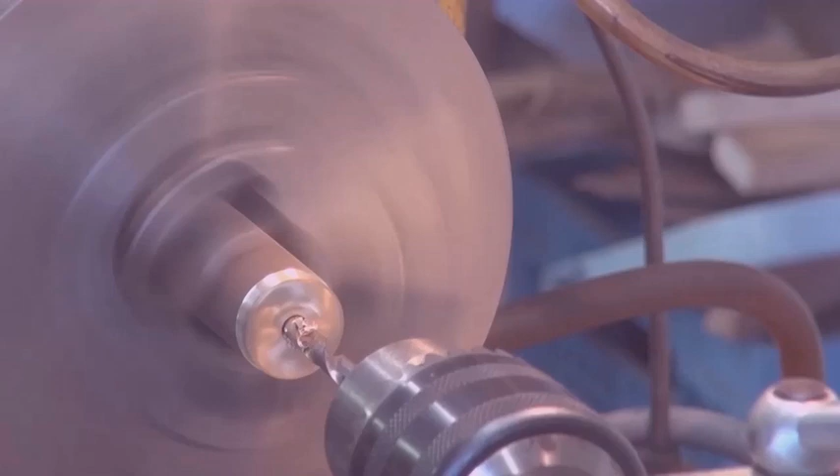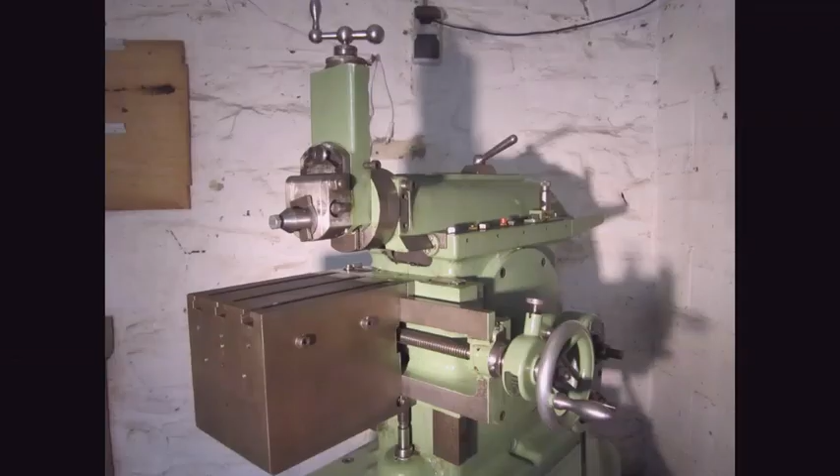For more than 2 months now I haven't done anything in this workshop because of this cancer I have, but that's okay. I thought today we're gonna try to make something. But before I start whatever project, maybe first I'm gonna clean up this mess, because it's been more than 2 months that all this stuff is laying here.

I think this one goes here.

I think when you have a workshop where everything is more or less clean, that's a big part of happiness. I know for some people happiness is just an illusion, but for me it is not. I believe you cannot live happily, have a happy life, without it. Maybe that's an illusion, but my system is I try to be happy with the smallest things.

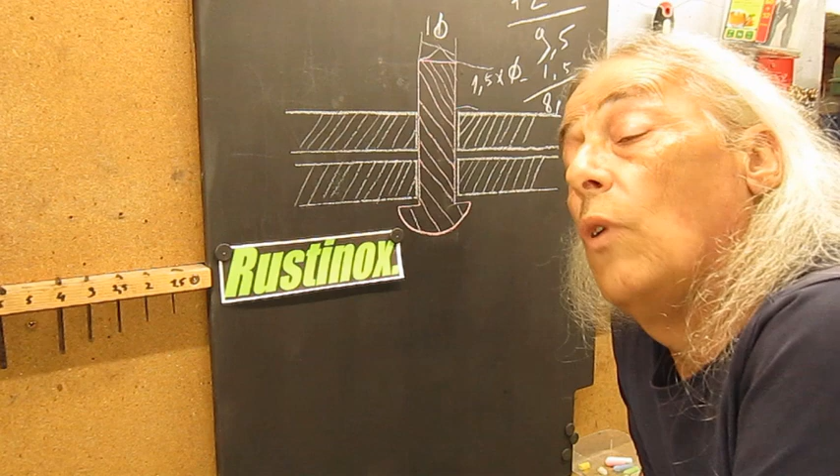I think that could be a beautiful project to do. Here also you can see it's been a long time since I've been in the workshop, because the rivet video thing is still on my blackboard, so we're gonna take it off. Oh, and my TMC project is still here.

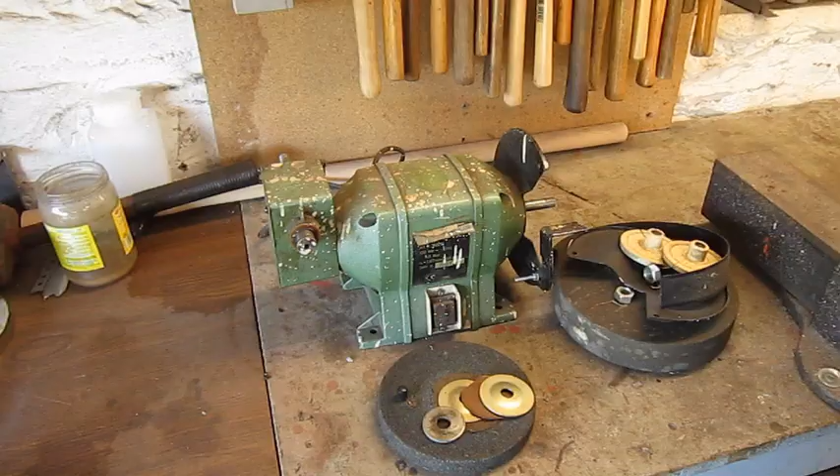Magnets. Another upcoming project is to try to make something useful out of this cheap scrappy thing I recycled. The motor seems to be okay. Axle spinning freely, no problem, no end play. Here seems to be a problem, you see.

And then the fun trick is you have this, I'll move it a bit, the high speed wheel on one side. You see how crappy it is. And then take all the junk out. This big one is a low speed wheel, but I think it's a bit of a weird idea to mount it on the back side. It should be better this side. I don't know. And you cannot use it with water because there's only a guard, that's all. There's no water container or oil container to use it.

So this is an upcoming project. Of course, I don't know when, but we'll see.

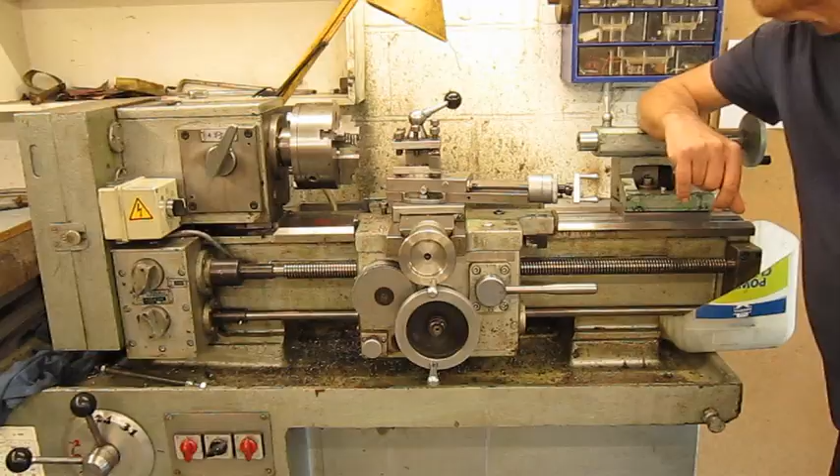Another upcoming project is gonna be to fix the tailstock of this lathe. Let me explain. Some previous owner, I don't know who, raised this headstock. You see here this gap. So this height we win in height between the spindle and the bed.

Of course, to compensate for this height, you have to make this plate to raise also the tailstock to have it back in line. But since I have this machine, there's a problem here with stability, and I think there's something wrong with the angle they cut out, or I don't know what, some dimension problem, and I think I'm gonna make a new plate for it.

So I have to find a piece of steel, these dimensions a bit more, and try to make it better. Yes, I did say try, because I think this is a complicated project.

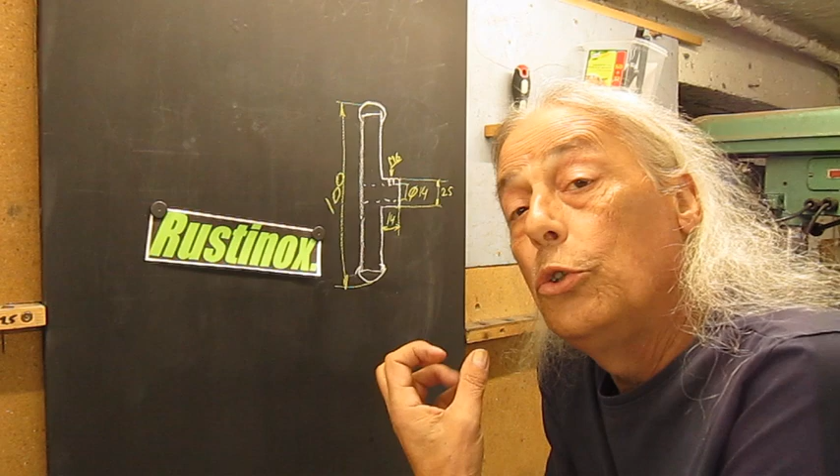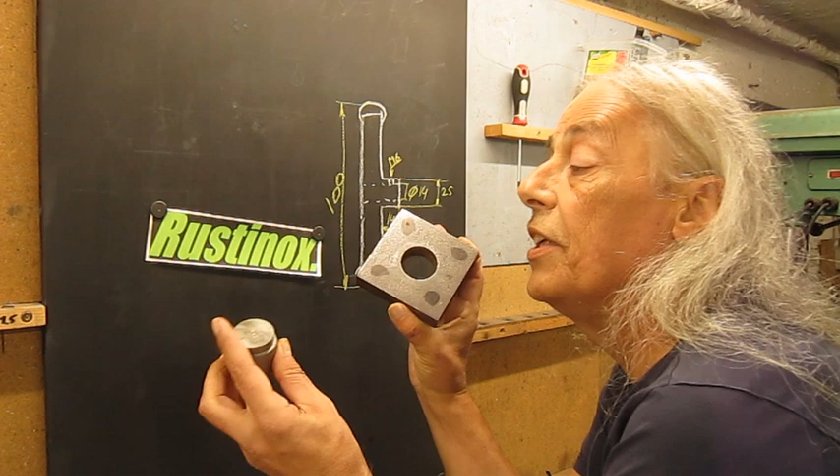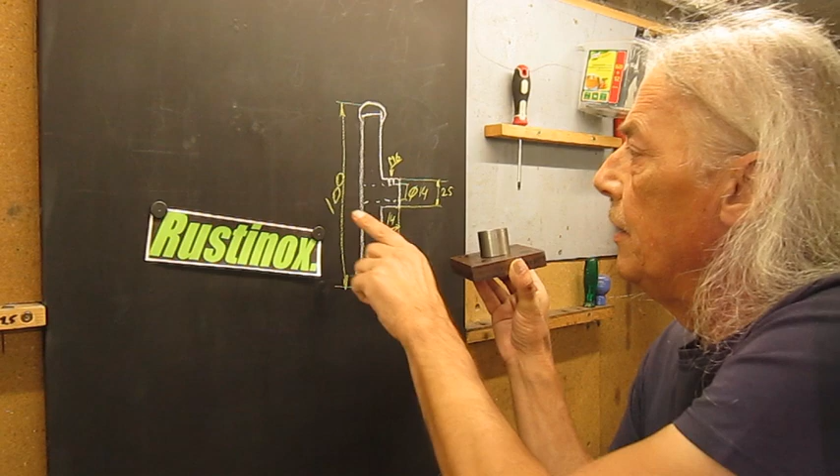I think today's project is gonna be to make this little handle I told you for the shaper. Of course, I do not have the good raw materials to make one, but I have this square thing with the hole in it, and this hole is way too big, so my idea is to make a plug, weld it in, and then cut the corners off, and out of this I can make these dimensions you can read.

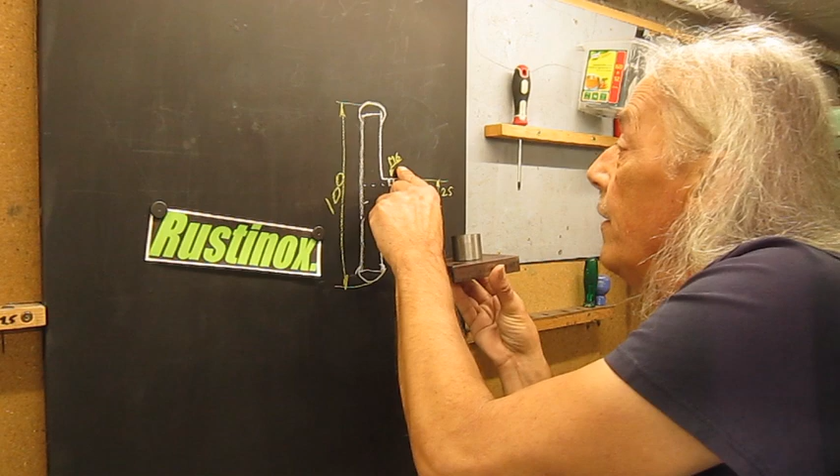So this 100mm will be a bit less because this square is 100mm. But I suppose that's okay. And then drill a hole and tap M6 for the set screw. I think that's a beautiful little project to start with.

In theory this should fit. I'm going to give it a little try.

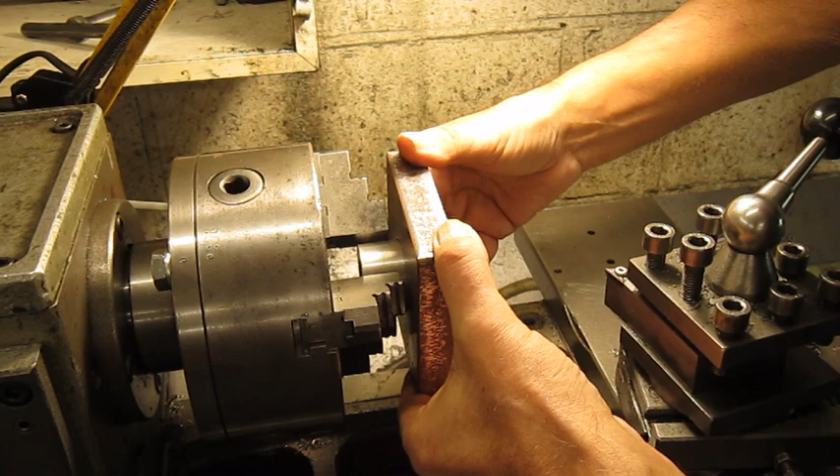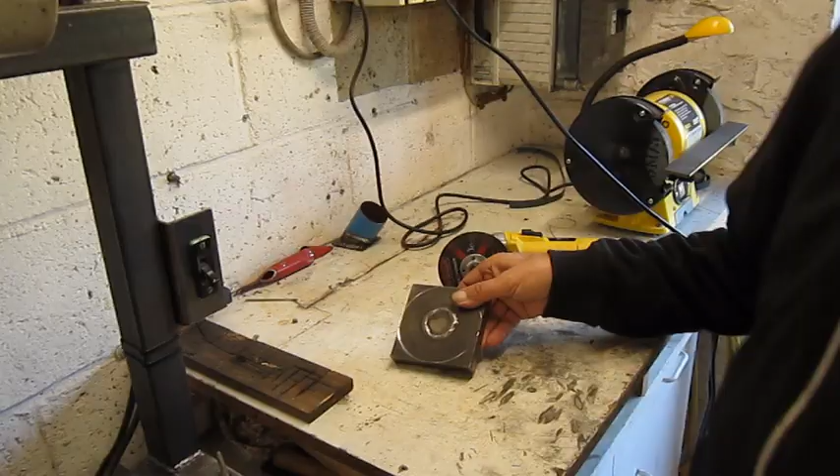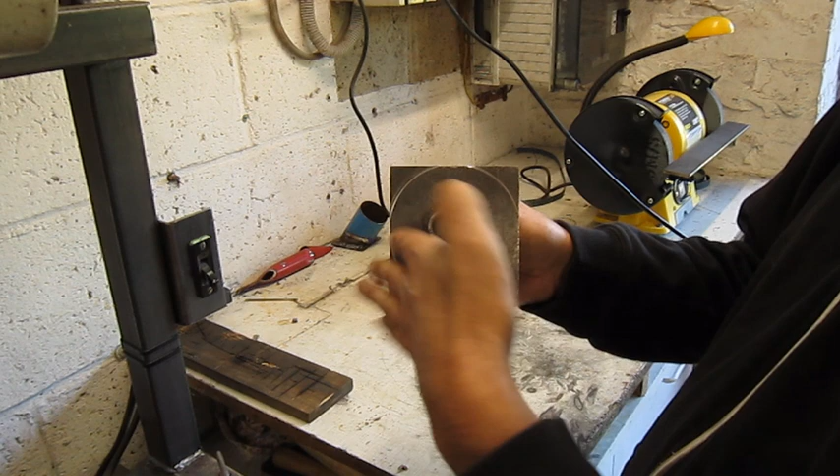To determine more or less a circle for my hand wheel, I put the part in the lathe, clamped down on this side. Of course, for the moment they're still out of square, but we'll fix it. So first I'm gonna cut off these corners with the angle grinder. Let's make some sparks.

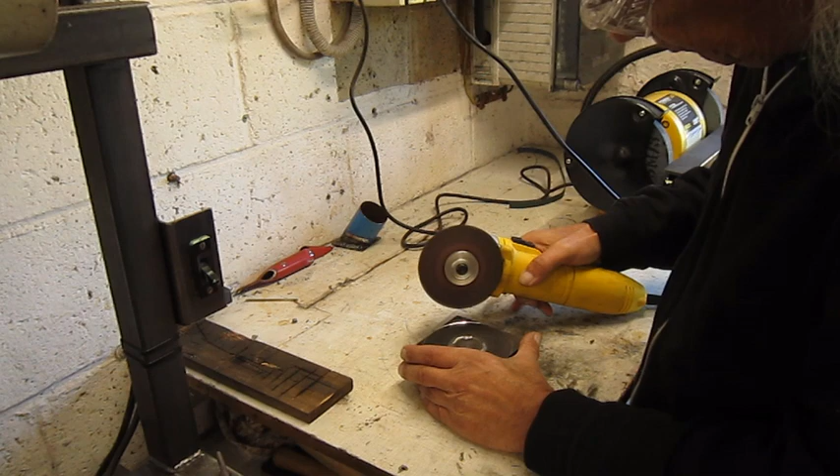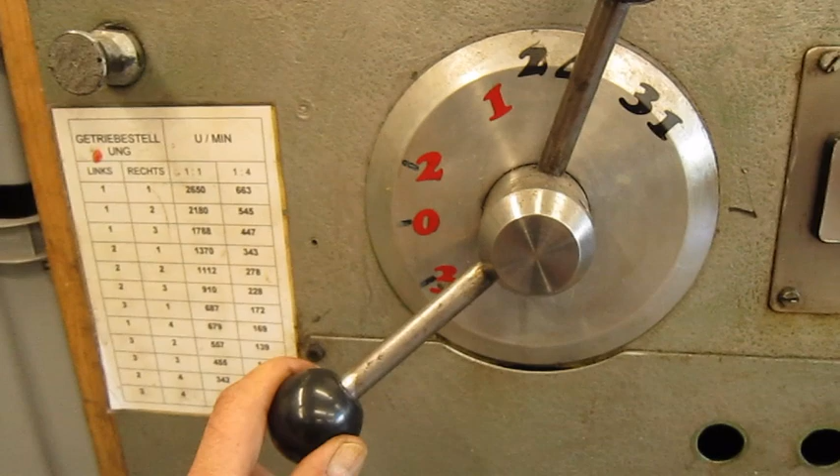Oops. This oops moment was not really an oops moment. When we look here at the gearbox changing, these levers, you see they're spinning, and there's this pointer, and it was not really completely engaged, and at some point it just jumped out of gear. That's all, so nothing special.

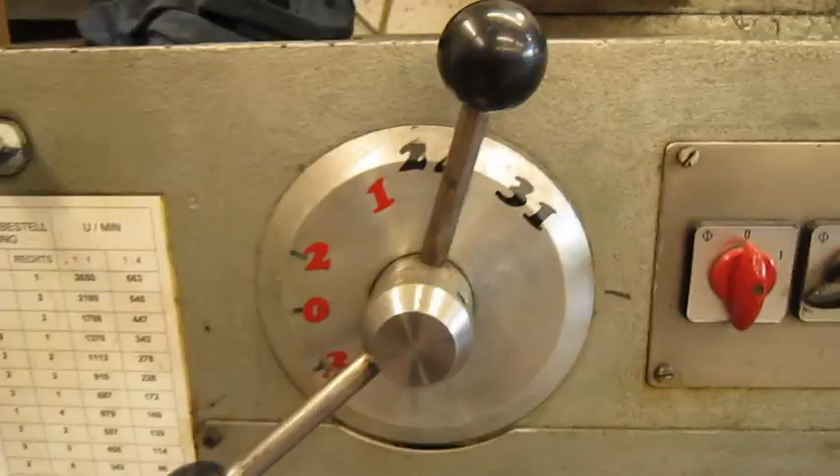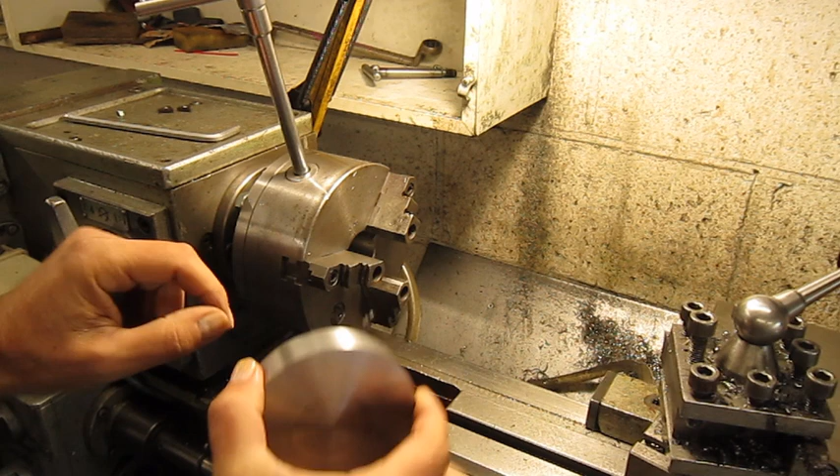The finish is maybe not terrible on this part, but that's not a problem. I'm gonna round it, so we'll be okay. Okay, I'm gonna take it out, deburr a bit, of course. I'm gonna flip the jaws around and put it in the other way to work this shoulder.

I faced off this vertical face, the big one. Now it's time to reduce this diameter, and because I'm working against a right shoulder, maybe it's the ideal moment to try out my freshly made carriage stop. I never used it.

Looks good. This now is about 39.5. We're gonna reduce it to 25.

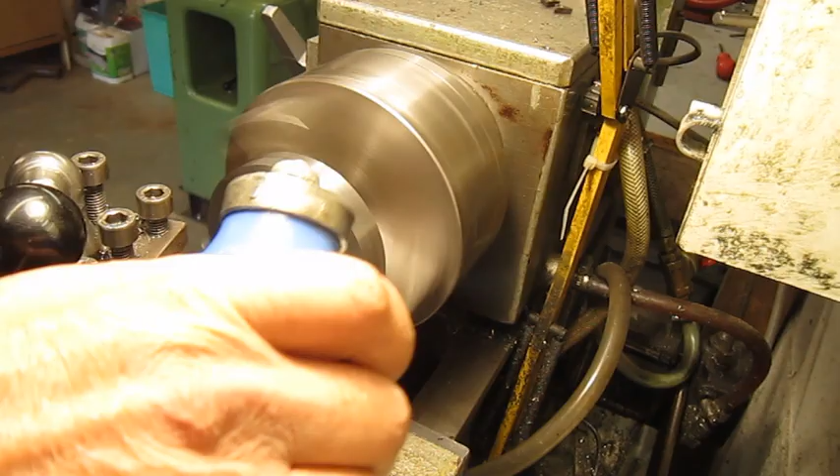The finished size of this boring should be 14 millimeters. So I'm gonna drill it out with a 13, and then with the boring bar finish it out till I reach 14.

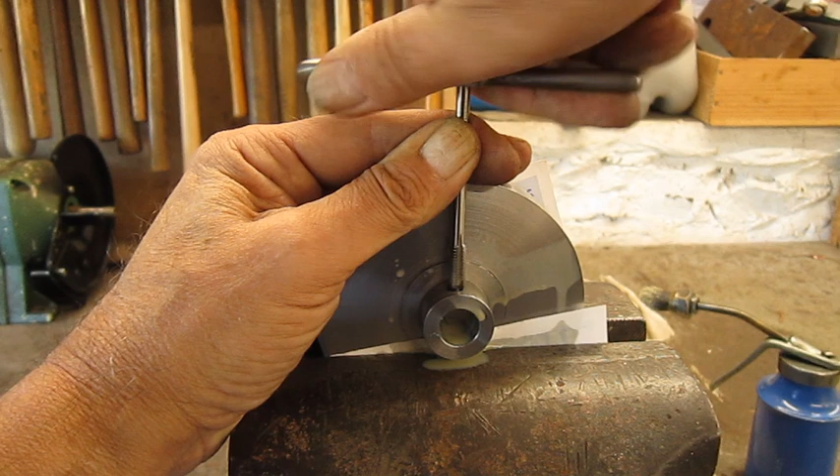Now, before I make these rounded forms here, of course, like anybody else, first I tried it and it fits. The problem is now, this thing is really hard to turn. It's really not handy. I don't think I'm gonna leave it on. I don't think I'm gonna use it, because for me this doesn't work. It's too hard to spin.